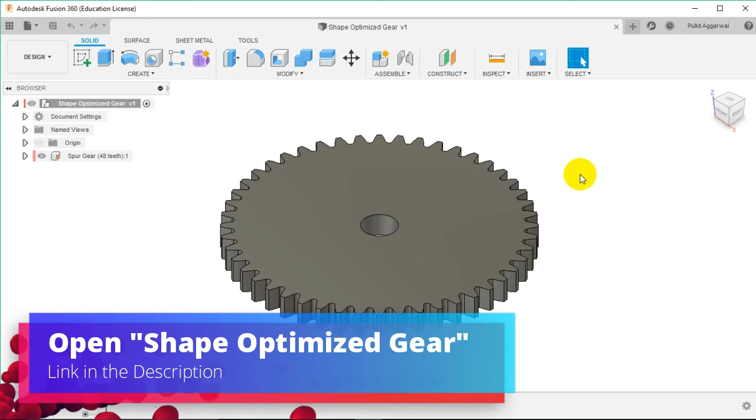So open the supplied file shape optimized gear. Now let's go to the simulation workspace and select shape optimization. Now in this shape optimization, it doesn't look at the magnitude of the loads we apply, only the load path. It is not looking to see if our design will meet a specific factor of safety criteria or fail under any of the conditions we apply. It tells us where the loads are traveling to help us identify areas of tweak and remove the material.

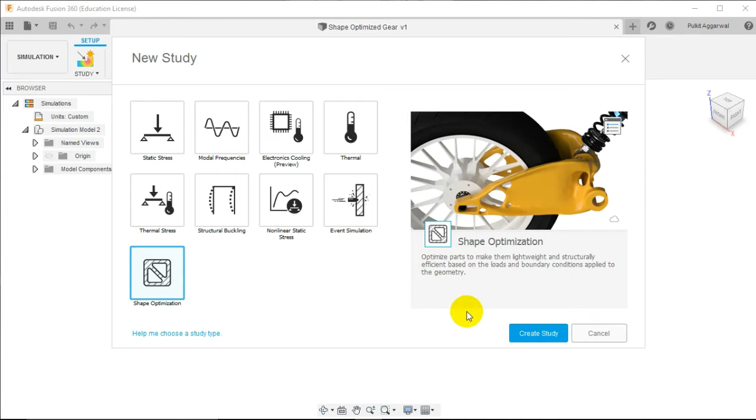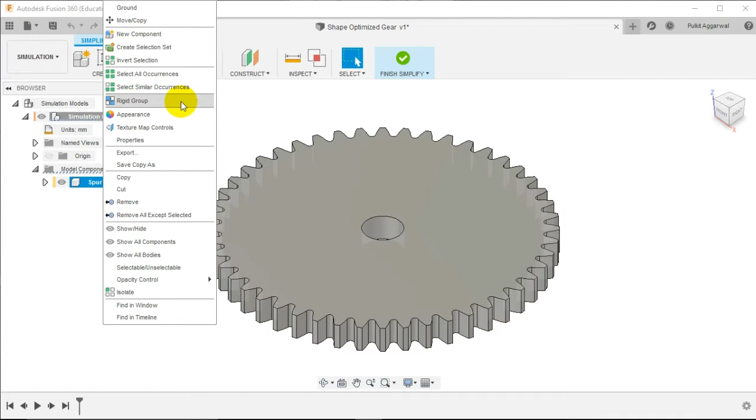Let us create the study. Now let's head over to the Simplify workspace. Now in this Simplify workspace, let us first ground our component. It is a very good practice, especially when you are working with assemblies, as in the Simplify workspace, there is no capture position option. So let us ground our spur gear. Now let us create a sketch on this upper face of the spur gear.

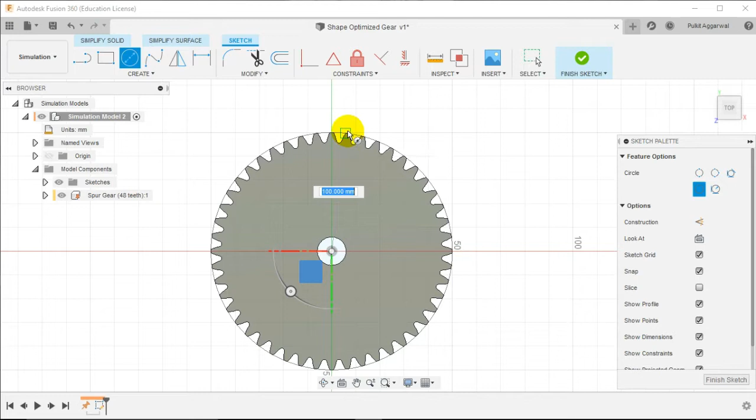Create a circle from the center to the top of the teeth. Now I want to fill all these teeth, as we are not looking to analyze how the stress or the load is transitioned through the actual teeth of the gear. We really want to look at where we want to remove the most of the material. So let us finish the sketch.

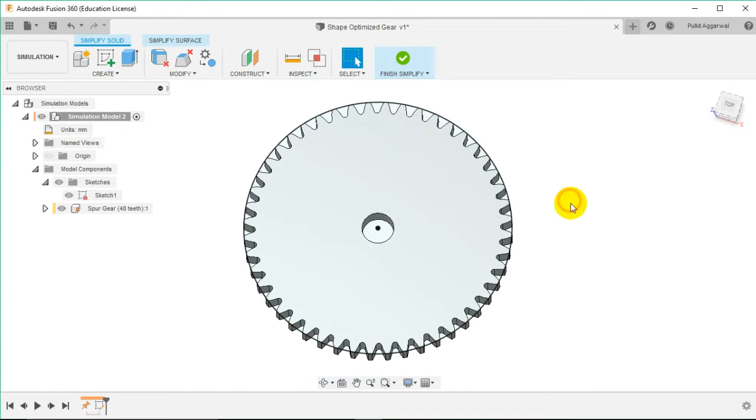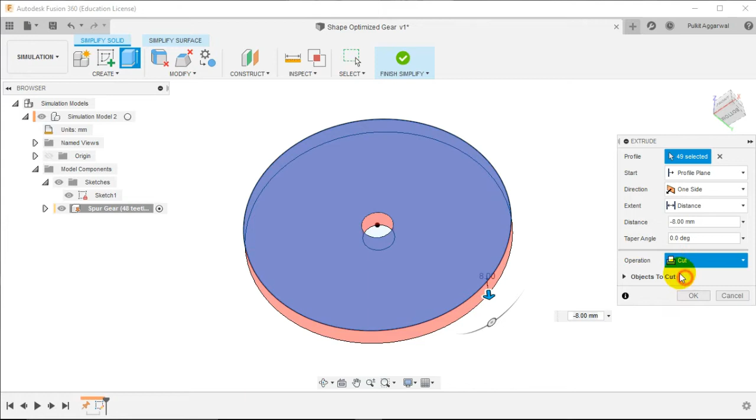Now let us extrude our sketch. So instead of selecting the teeth one by one, we will select the whole, and by pressing the control key, we will deselect the hole in the center. Now we will extrude it to the next surface and make it join instead of cut, and click on OK.

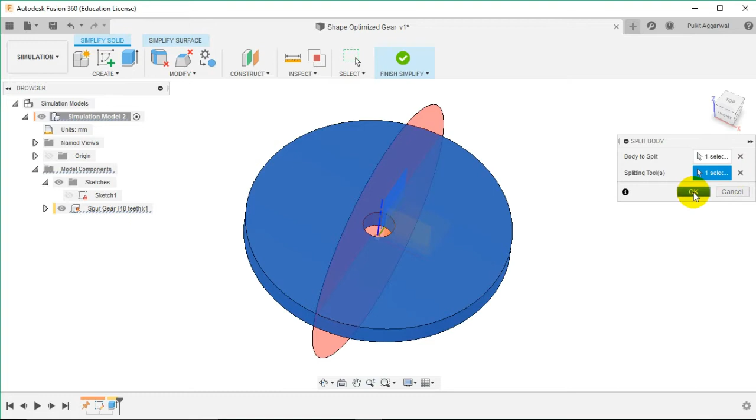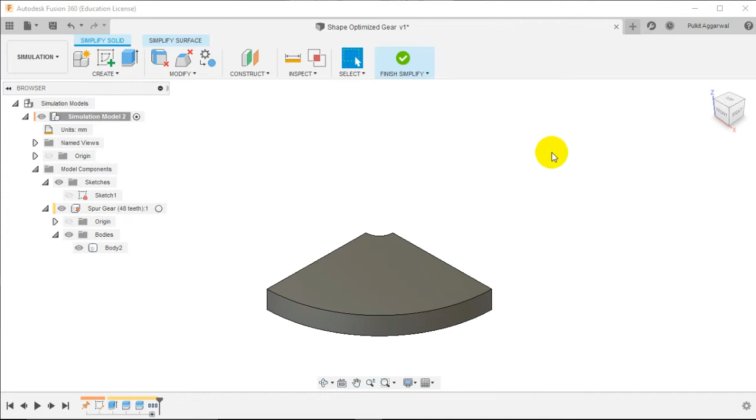So we will go to modify and split body. Select the body, and this splitting is to be done about this plane. And now we will again split it across another plane, selecting this body and selecting this plane, and click on OK. So now head over to the spur gear, and in the body section, click on the body 2 and click on remove all except selected, and click on finish simplify. Now we have a quarter spur gear.

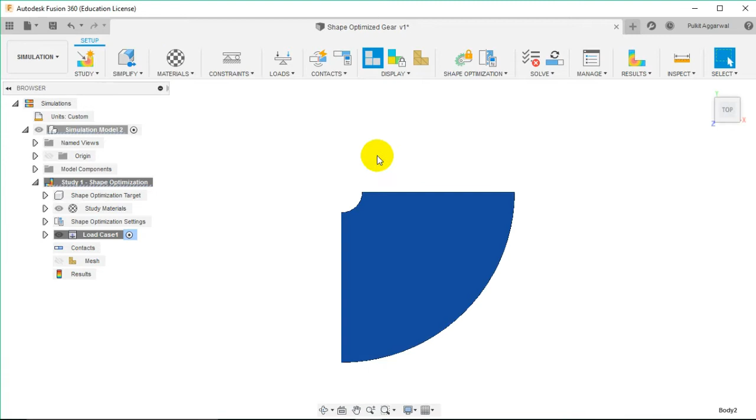So now let's go to the study materials. In this, the previously assigned material is steel, but we want to change the material to a plastic UHMW black, and click on OK. Now we want to apply constraints. So we will be applying a fixed constraint to the outer surface of this spur gear, and click on OK.

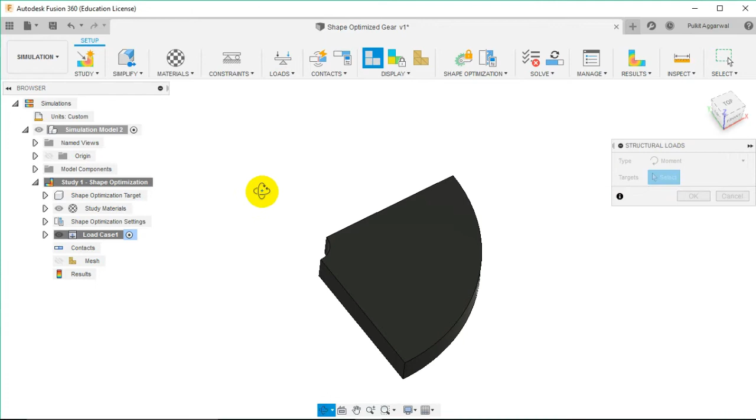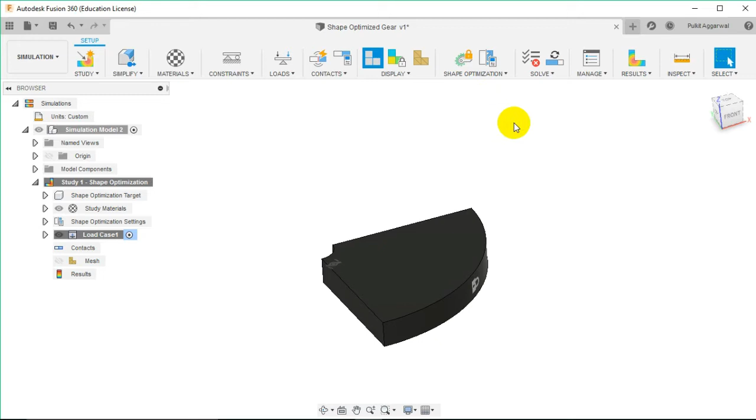Now for the loads, we will be applying a moment load on the inside surface of the spur gear. So we will be selecting the surface. We will be changing the units to pound force inch, and the value of the moment will be 36. Now as we do not have multiple components, we do not have to apply contacts. Now we can see in our pre-check that the study cannot be still solved.

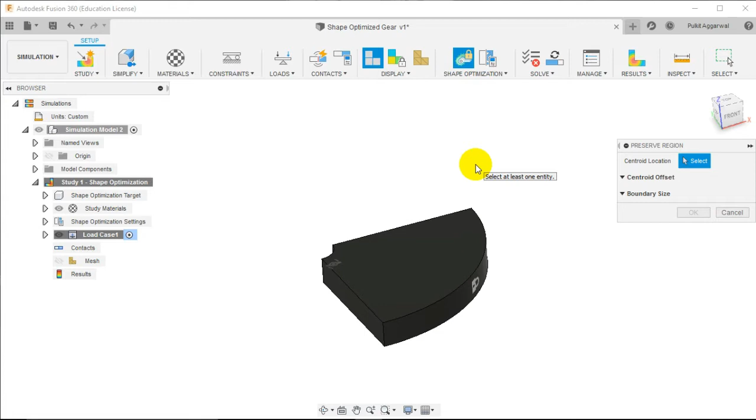Go to shape optimization and select preserve region. When performing shape optimization, the study needs to know exactly what geometry it can change and what it has to keep the same. Thus, it uses preserve geometry. So we will be selecting this upper edge. So this automatically configures what type of geometry we want to preserve. In this section, we can select the type of geometry, that is box, cylinder, or sphere.

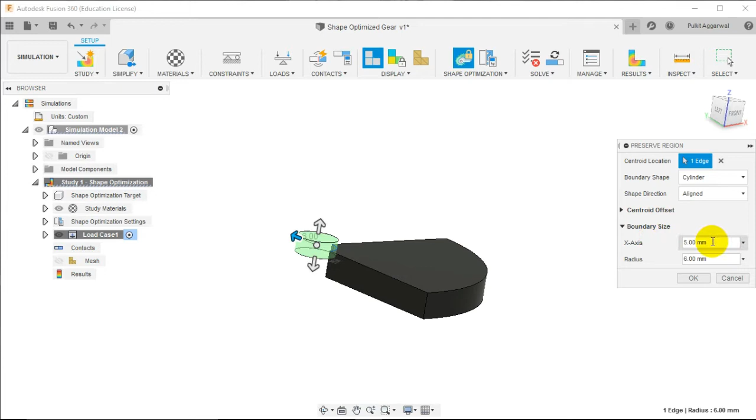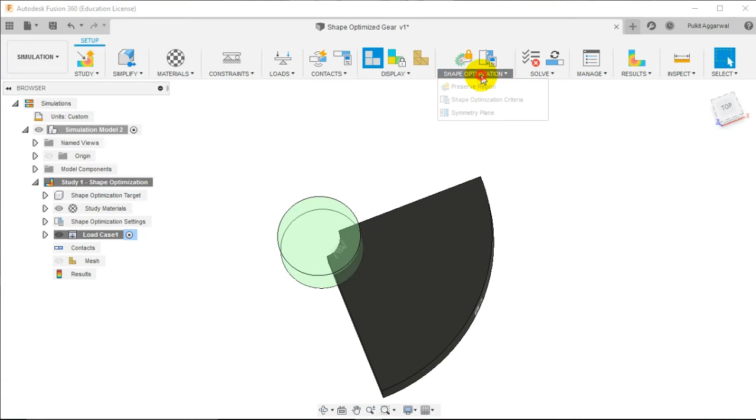Define the length of this preserve section and the radius. So let's make the x-axis to be 15 millimeter and radius, let's change it to 12 millimeter, and click on OK. So this will be our preserve geometry. So in this shape optimization criteria, we can see two parameters, that is target mass and stiffness. The stiffness cannot be changed, but the target mass can be changed. So let us change it from 30% to 40% and click on OK. So our preserve region is created.

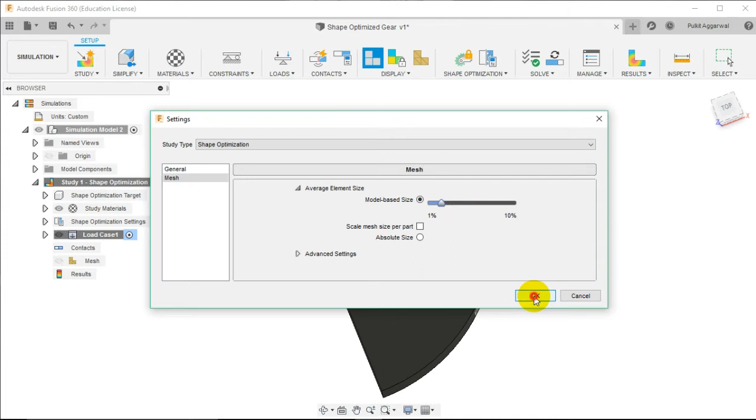Now we still see that our pre-check is not ready and it says that this shape optimization target is missing. So let us select the shape optimization target and we select our target body and click on OK. Now we can see that the pre-check has verified that we can solve a study. Now before solving the study, go to the settings and in mesh settings, decrease the slider to about 2 to 3% of the average element size. Ignore this error. Now our study is fully ready to be solved.

So let us solve this study. We can see that this study cannot be solved locally. So we will solve this study on cloud. It will use 5 cloud credits. We do not need to generate the mesh as it will automatically be generated when we click on solve. Now we can see that our study has been solved.

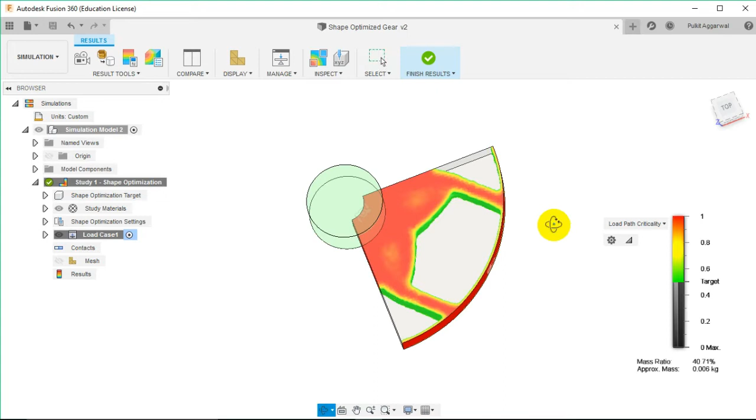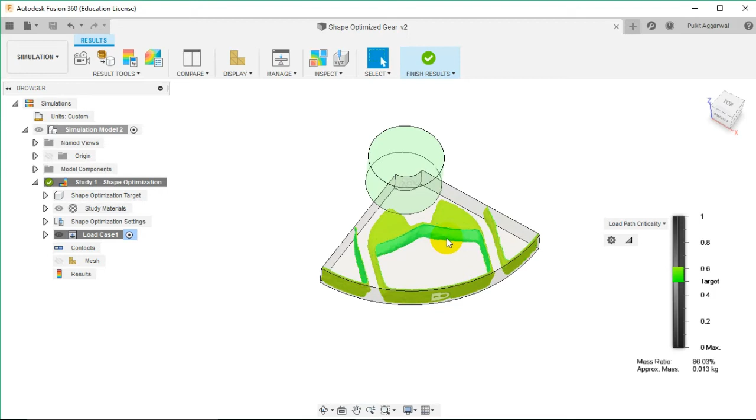Now in this we can see the load path that has been created in this spur gear. Now we can adjust this slider to see where we can fulfill our target. It is set to our target in this area and we can slide the upper slider to see the optimal location. Now here we can see that a pocket type region is being created. So we are talking about making the gear through conventional processes like CNC machining or injection molding. So this pocket type region will not be possible to create.

Now let us set this to the upper value. Now let us go to the result tools and select promote. Now in this select the design workspace as we want to add a mesh object to the design workspace and click on OK.

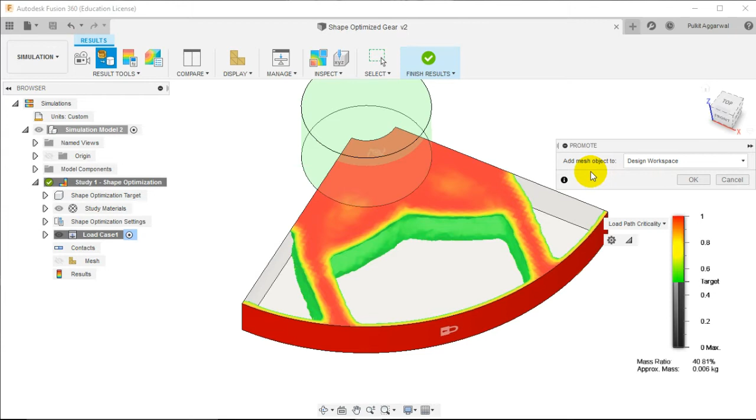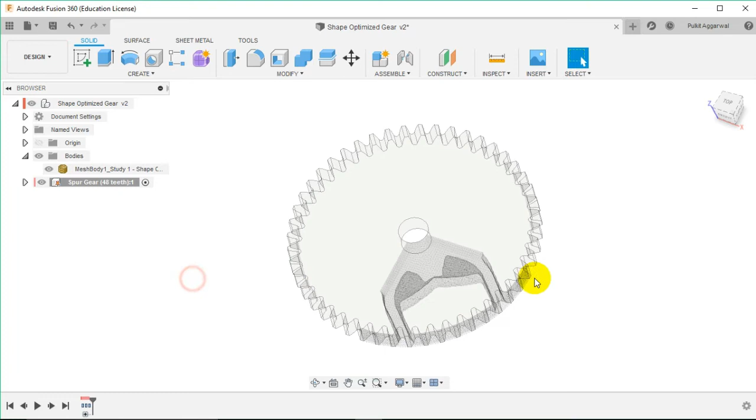So now we can see that our mesh component has been promoted to the design workspace. In the body section we can see that our mesh body has been created. Now let's activate the Spur-Gear component. Now in this we want to create a mid plane between the upper surface and the lower surface of the Spur-Gear and click on OK. Now let's again change the opacity control to 100%.

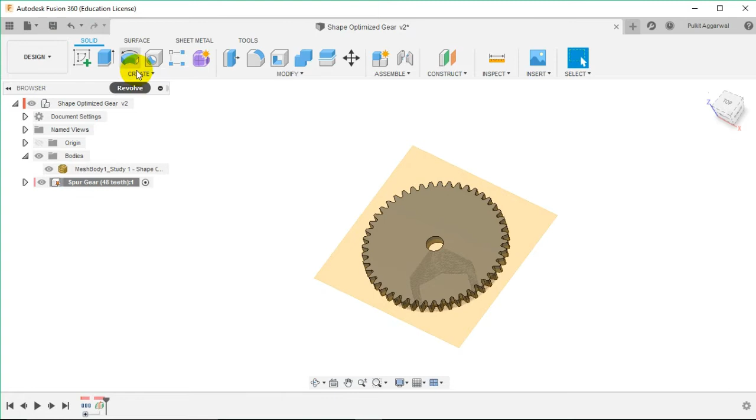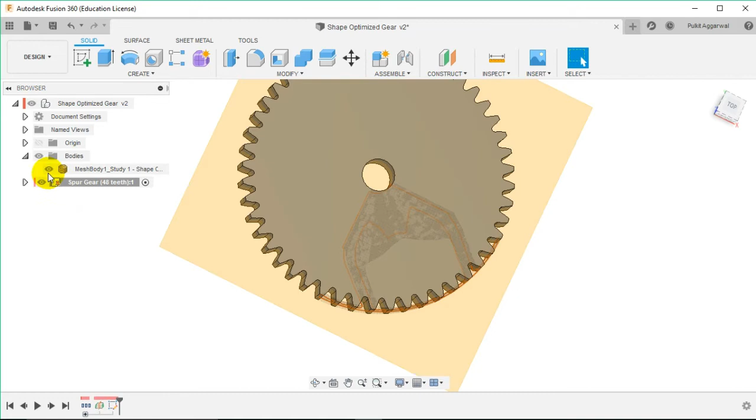Now after creating the mid plane, let's go to create and select create mesh section sketch. Now select the mesh body and select the mid plane that has been created and click on OK. Now we can see that a mesh outline body has been created on this plane. We can turn off the mesh and change the opacity to about 30%. Now we can clearly see the sketch that has been created.

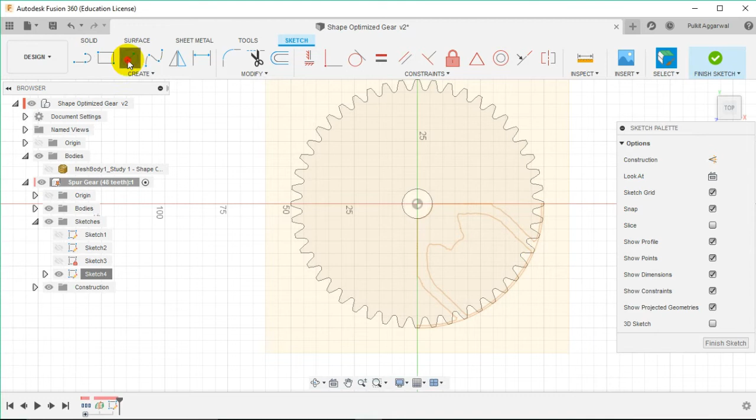So let's go to the sketches and edit the sketch. So first we want to create a circle up to the boundary of the teeth. Let us create the inner circle to be 35 millimeter and the outer one to be of 65 millimeter. Now create these vertical lines and a line at 45-degree angle. So dimension this.

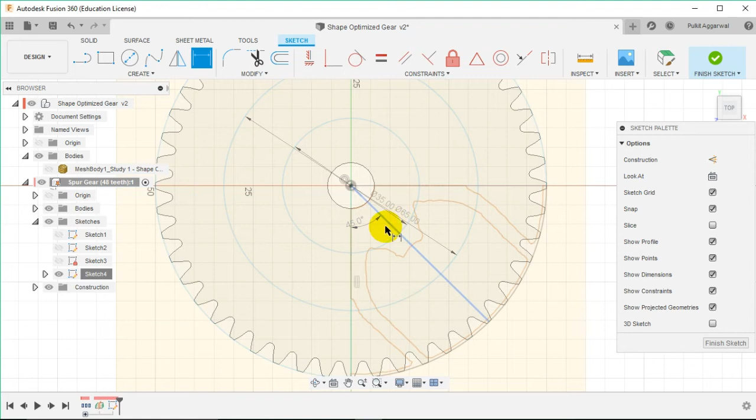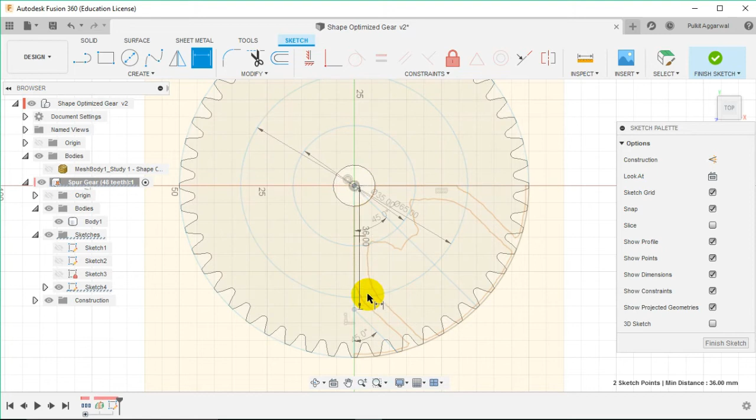Now we want to also remove this section that has been created here. So let us again sketch a line. Make sure that no additional line is created and again dimension this at a 45-degree angle. Now we want to define the distance between this center and this point. So let us dimension this as 36 millimeters.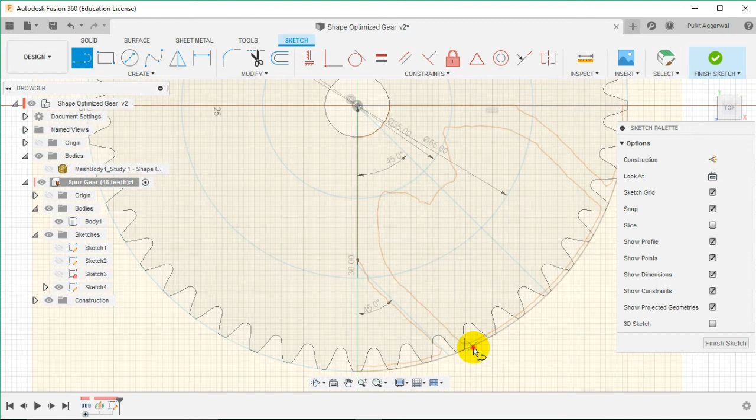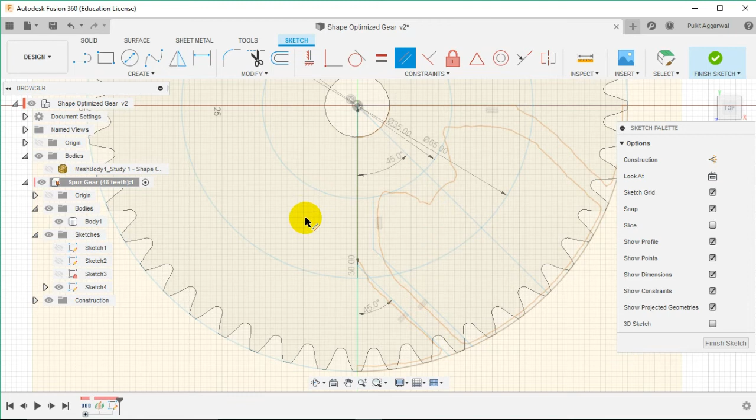Now we want to mirror these lines that we have created. Now again select the line tool, select this point, select any random point and create a vertical line from this to this circle. Now we want to apply parallel constraint to these lines. Now using the dimension tool, let us add a distance of 5 millimeter between them. Again, between these two, we want to apply 5 millimeter. Now we can see that we are approaching this region which we want to remove.

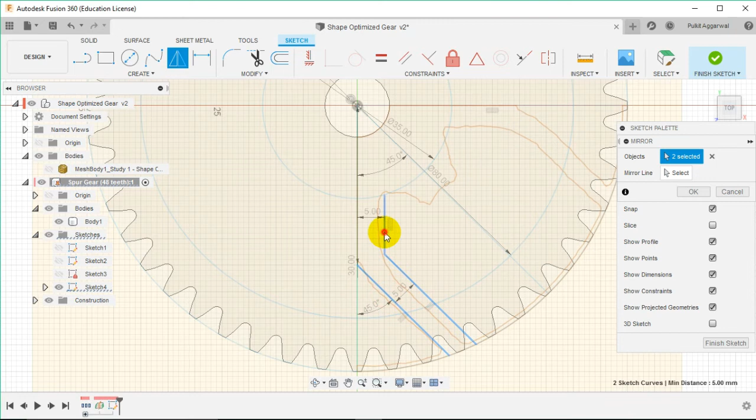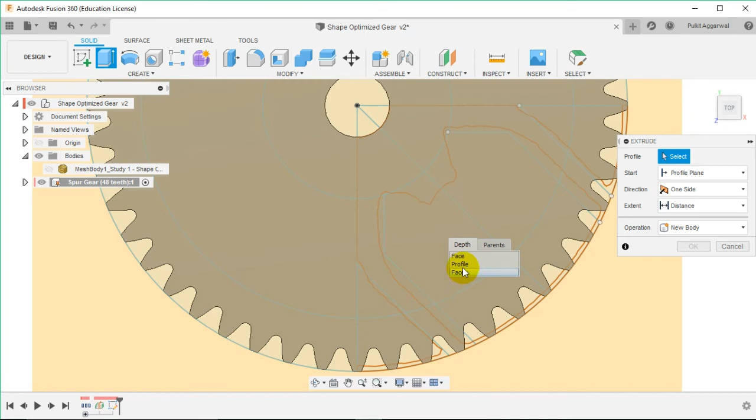Now we want to mirror these lines that we have created. So let us select these lines that we want to mirror and select the mirror line as this line and finish the sketch. So now we have created the regions that we want to cut from our design workpiece. Now go to the extrude. Now to select the profile, press the left mouse button and select the profile. Again, select this profile,

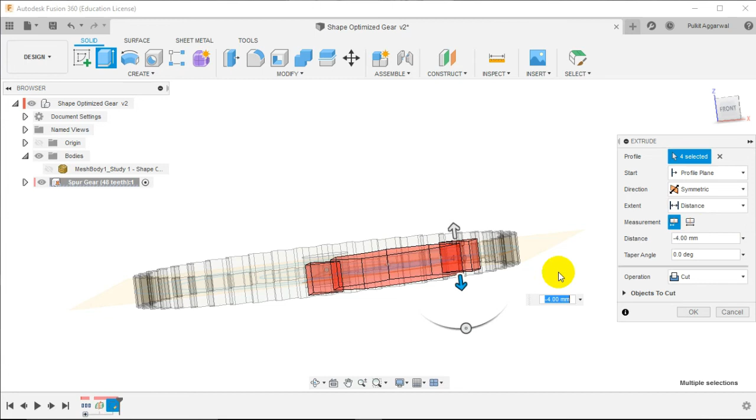and this. Now we want to cut this profile up to this surface and select symmetric on two sides and cut. So now we can see that we have removed the features from our spur gear.

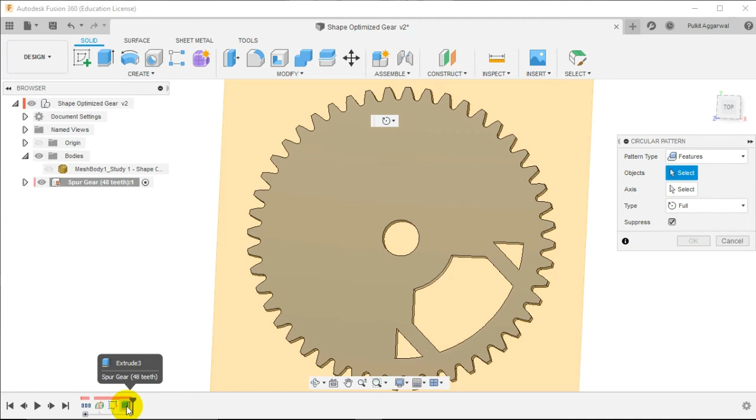Now let us create a pattern of these features. So we will go to the features and from the timeline we will select the extrude features and select the axis as the Z axis. Now let's change the quantity to 4 and click on OK. Now we can see that this is the final gear that we have obtained from topology optimization, or we can say shape optimization. So let us perform a static study on this gear.

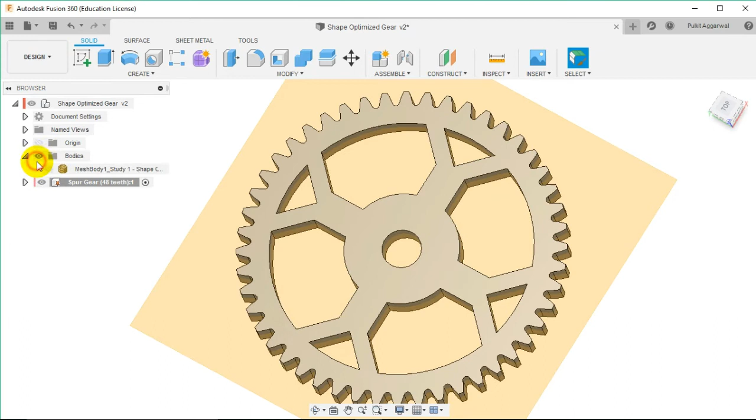So now in the simulation workspace, create a new simulation study and create a static stress study. So in the simplify workspace, click on create and select new simulation model. Now we can see the gear that we have created. Now let us click on finish simplify, and it is again asking us to create a static study. So let us create a study.

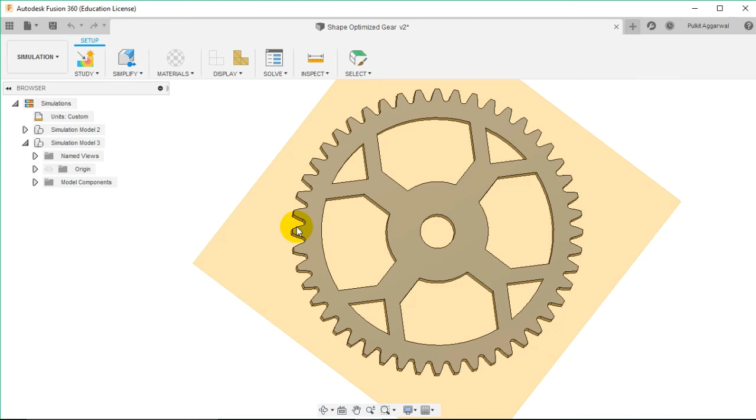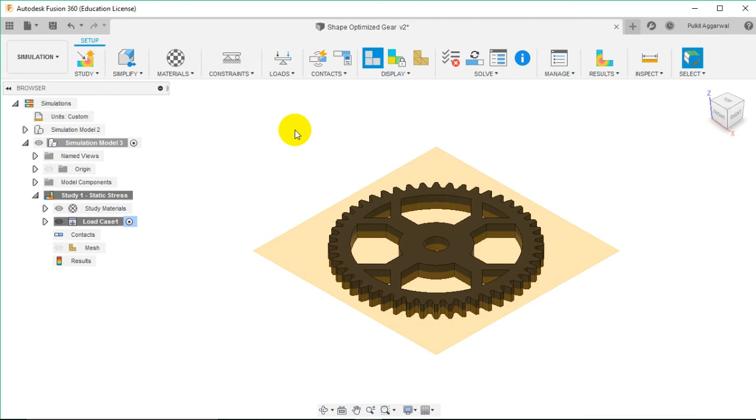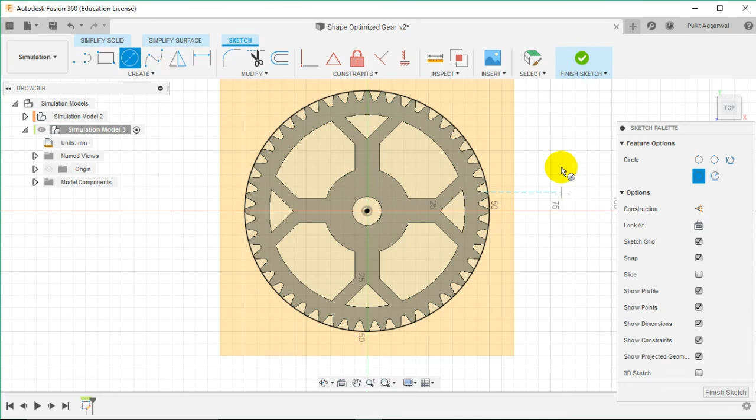Now first we want to select the material. We can see that it is showing us the previous material steel, but we want to change it to the plastic UHMW black and click on OK. Now apply the constraint. Now let us create a sketch on this plane. We want to remove the spur teeth as we are not looking at the stress developed on those specific teeth. So let us again create the sketch, finish sketch. Now we want to extrude.

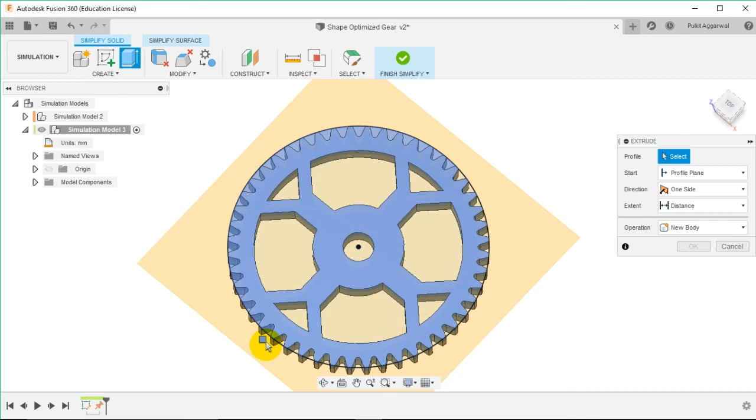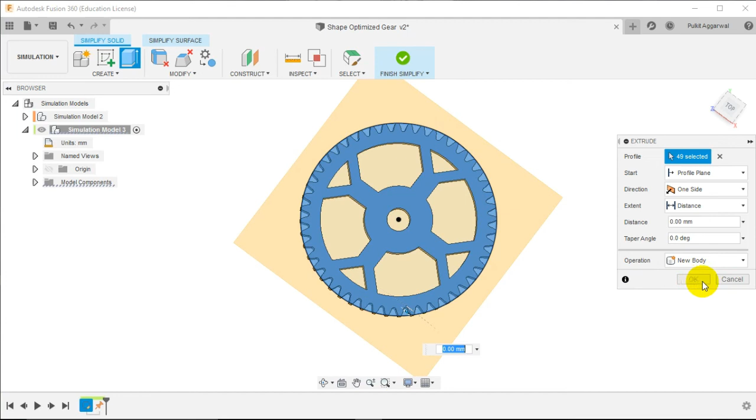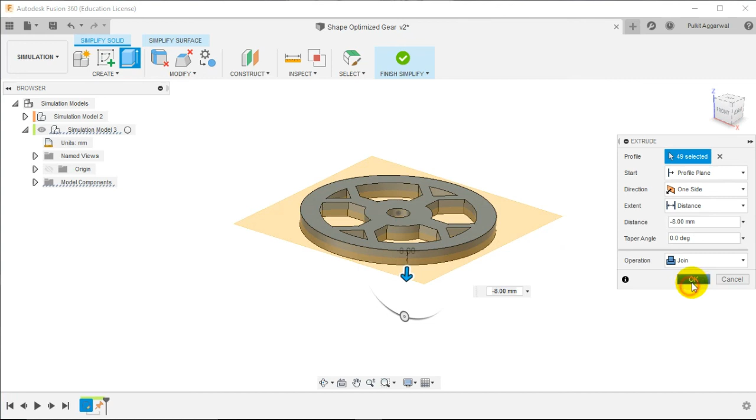So hold the left mouse button and select all the teeth that we want to extrude, as we are not looking into the stress developed at each of these teeth. So we want to simplify our workpiece by removing these teeth. We can simply do this by using the extrude feature. Select join and set the distance to the lower surface. Now click on OK and finish simplify.

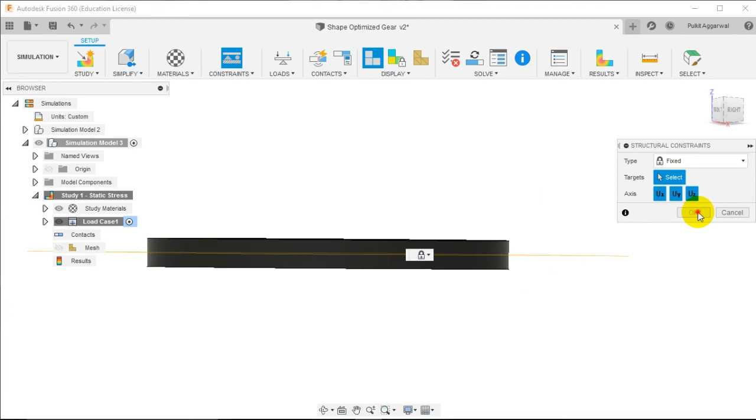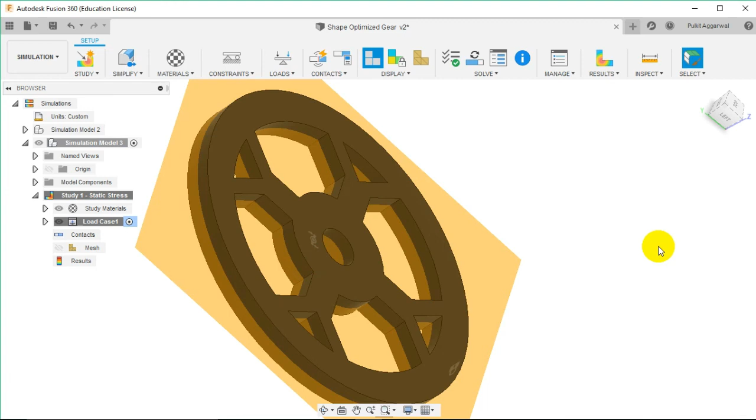Now we want to change the material to our previous plastic UHMW black. Now let us apply constraints to the outer boundary. Let us make it fixed and click on OK. Now for the loads, we will be using a moment of 36 pound force inch in the inner hole. As we are dealing with a single component, we don't need to apply automatic contacts, and we see that our pre-check is ready and we can solve our study.

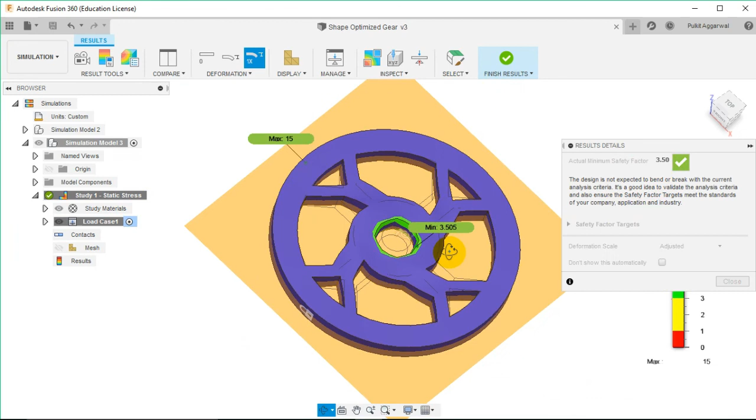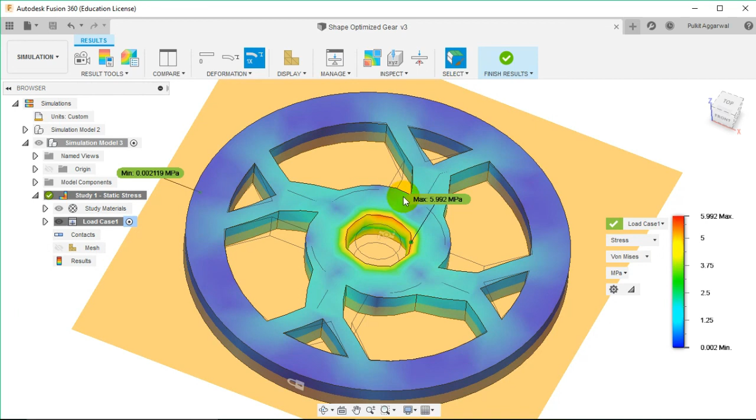Now we can see that our static study has been solved. Looking into the results, we can see that the minimum safety factor is 3.5. Thus, even after removing lots of material, we still have an appreciable safety factor. Let us look into the stress that has been developed in our spur gear. We can see that in these boundaries there is no stress accumulation, only in the center. So click on finish results and save the file.